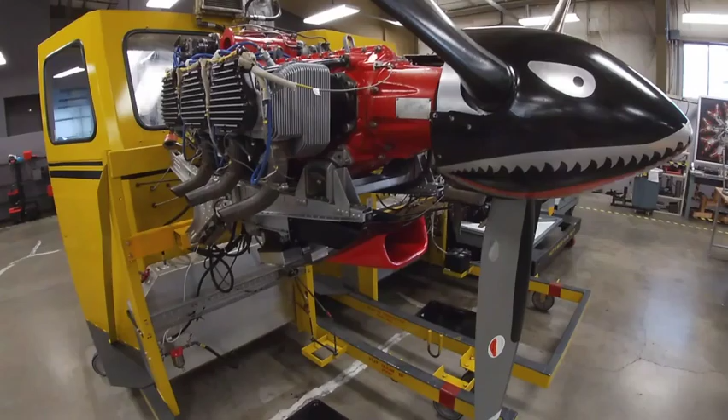Directly driven supercharged engines. Let's take a look. On this GSO 480, I should say IGSO 480, we have a directly driven supercharger, which is going to supply actual boost to this engine.

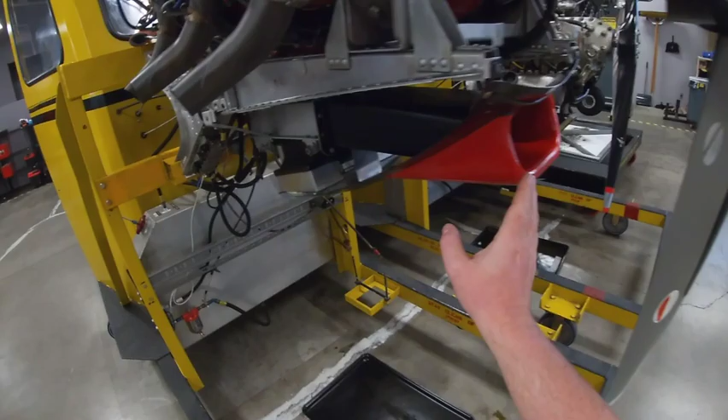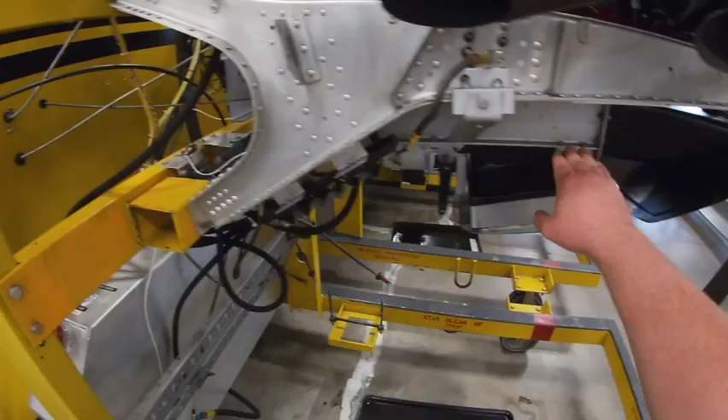The way this works is we have the front of our intake over here. This is our ram air inlet. It is going to travel through this inlet manifold, or what we call a trunk in this case. In most cases, if you have an updraft system like this under the engine, it gets referred to as a trunk. It'll come back up through here. We have our pipe, which is coming up to our supercharger section right here.

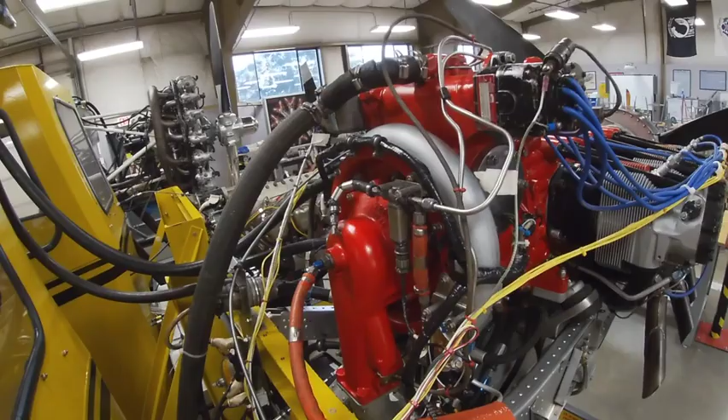Now, this one's a little bit different than some other situations you might see because this is actually an injected engine. However, it is not injected at each cylinder. Instead, what we have is a single point of injection, which is injected directly into the supercharging chamber. And down here is where we have our throttle plate, which is going to regulate airflow into the engine.

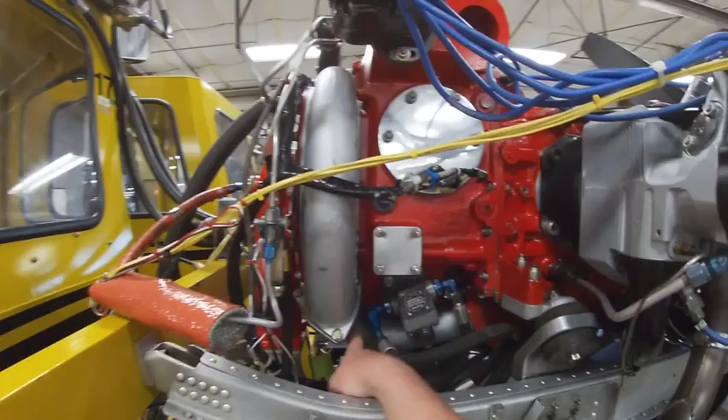Now we have an injector controller, which is controlling the fuel flow. We don't need to cover that right now. We're just focused on the supercharger itself. But you can see the housing back here. Our injector's right here. Airflow is going to come up. It goes down into the center of our impeller. It's going to get slung out against the diffusers out into this outer track. And then we're going to see it follows this intake manifold portion, which travels through the sump, and then we go to each one of our individual intake pipes.

Now, one of the reasons that you can get away with direct injection like this is because even if it's a supercharger that provides boost, it still has the ability to act as a distributing impeller, which means if we shoot fuel into it, then that fuel is going to get effectively blended up by the impeller and evenly distributed out to all these cylinders.

Now, in this case, it's a little bit different than what we would see on the 985, which we'll take a look at in a minute, because we're traveling through a single point of exit from the supercharger going out to our different intake pipes. So really, this is one fuel charge that's getting distributed out here where the pipes start to branch off.

Now, on the flip side, if we take a look at the 985, which is genuinely a distributing impeller, it works a little bit different. Now, this really doesn't provide any appreciable amount of boost. It produces a little bit of boost, but not a real appreciable amount. But what you can see as I look in here, grab a flashlight so it's a little bit easier to see. What you'll see as I look in here is these intake pipes, which are coming out of the supercharger section. Now, that supercharger section is being fed down here by our carburetor.

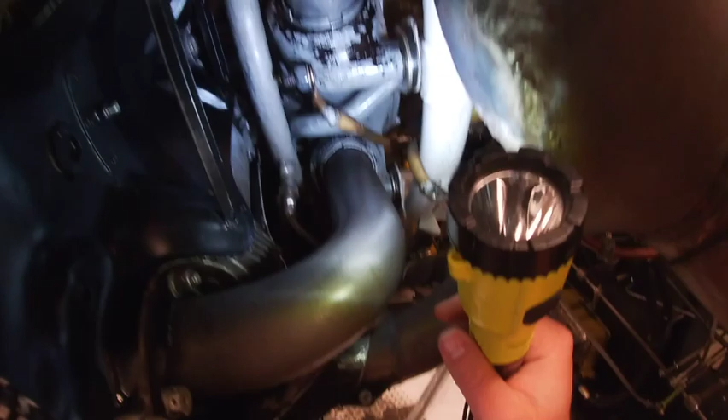Carburetor goes up into the supercharger. Voila! Again, same kind of flow down through the center of the impeller, but instead of going through a single exit point, that fuel coming from the carburetor is instead blended up by the distribution impeller, and it gets sent through each one of these 9 intake pipes in order to distribute fuel. So kind of a cool system. Works pretty well. Now, again, it doesn't necessarily have to produce much boost, but it does help us to get a more even distribution of fuel out to all of these cylinders, especially on a big radial engine like this.

Anytime we talk about supercharging an engine or producing boost, effectively we're talking about an engine that can produce manifold pressures above 30 inches of mercury or above standard atmospheric pressure. That's ultimately what we're talking about. With supercharged engines, they're driven off of the crankshaft, so rotational speed from the crankshaft is going to turn the supercharger impeller, which in turn is going to compress air as it enters the intake manifold.

Now, one key with turbochargers versus superchargers is that superchargers will compress air after it passes through the carburetor. Turbochargers compress air before it passes through the fuel metering system or carburetor. So that's ultimately what we're looking at.

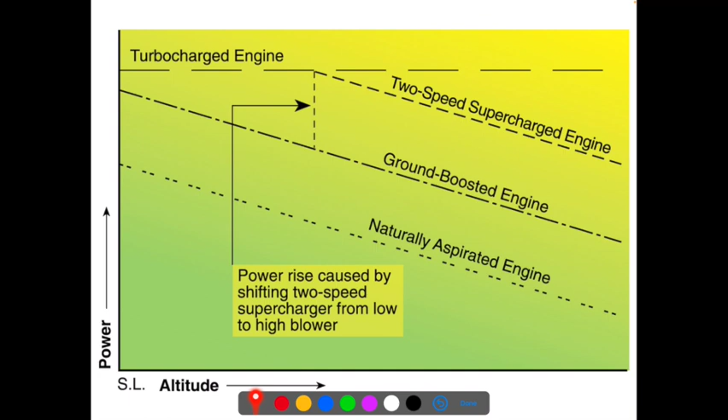Now, as we take a look at a turbocharger, effectively all it is is a cute little self-contained jet engine minus the fuel burning portion of it. Instead of having the combustion take place inside the turbo housing, what we have is a turbine, which is spun by exhaust gases, and then we have an impeller on the other side that compresses air that's entering the intake system.

Now, the area between the outlet of the turbocharger and the throttle plate, or the fuel metering system, is referred to as the upper deck. Anything past the throttle plate out to the engine is referred to as the intake manifold. Upper deck pressure will always be higher than our intake manifold pressure. The reason being is that the turbocharger is producing boost at the output, and that in turn is going to be regulated by the position of the throttle plate.

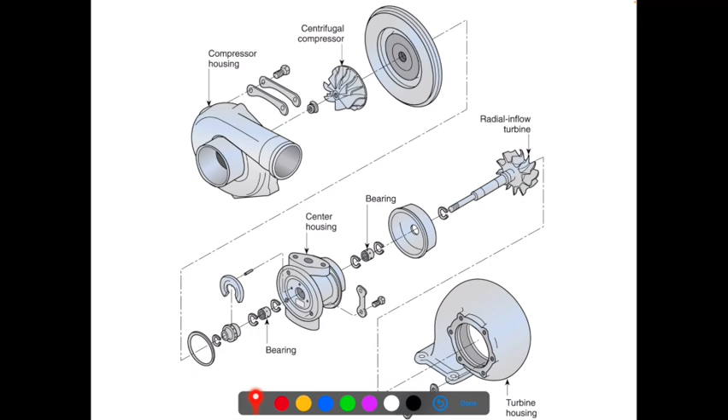Something you'll notice, though, is that turbochargers are fairly simply constructed. Part of that is because if we have too much weight or too much complexity, there's a good chance that it is going to overheat and come apart. In most cases, a lot of turbochargers can spin in excess of 100,000 RPM, which is pretty stinking fast, which moves us on to the lubrication requirements.

Now, one of the keys with lubrication in a turbocharger are these bearings right here. These are actually floating bearings. They aren't pressed into the casing. So what happens is as we have oil pressure coming through the inlet, it is going to pressurize these bearings. So it'll pressurize both the layer between the bearing and the housing, and it will also pressurize the layer between the turbocharger rotor and the bearing. So we have a nice little film of oil on either side.

It also allows that bearing to rotate at a slower speed than the turbocharger rotor is spinning as well. So in effect, we're getting more out of the same job with lubrication, so it keeps those bearings lubricated. It also has the ability to come into contact with the rotor, which is taking a considerable amount of heat from the turbine side. It can conduct that and take it out through the oil outlet.

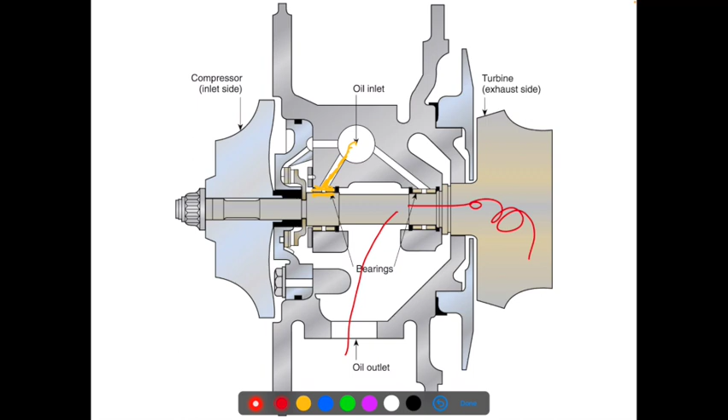So our lubricating oil both lubricates the bearings in the turbocharger and can remove heat from the turbocharger housing, and this is going to be fed from the regular engine oil supply in most cases. There's a notable exception to that, but we'll probably talk about that when we're actually in lab.

Now, if we look at a basic turbocharging system, it's pretty simple. All we have is exhaust gases, which are flowing to our turbine and exhausting through the exhaust pipe, which in turn spins the compressor, which draws air in and sends it back into the engine.

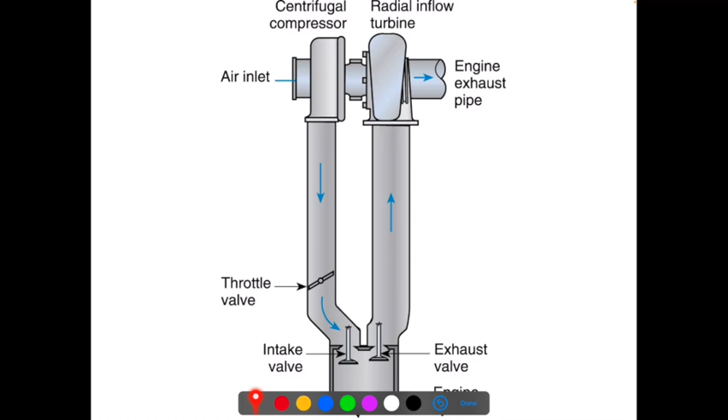Now, that's very simple, but there's no way of regulating this, so ultimately it's going to cause this turbine to overspeed and result in what we call overboost, which is very damaging to all the parts on the engine. So, in order to incorporate some regulation, we can use what we call a wastegate.

This wastegate here is installed in parallel to the exhaust system. So we have exhaust gas that's flowing through the turbine section and out the exhaust tailpipe, but we also have exhaust gas that can flow through the wastegate and out the exhaust pipe. The idea is that we have a spring inside our wastegate controller which turns this into a normally open position. When this wastegate is open, it allows exhaust gases to bypass the turbo and therefore slow down the speed the turbine is rotating.

However, when we build up oil pressure in this wastegate actuator, it forces this butterfly valve closed and forces more or all of the exhaust gas to flow through the turbine, therefore spinning it faster and faster, which gives us more compression going through the compressor side.

Now, the way this works is very similar to the way that a propeller governor works, in that as oil pressure enters into this wastegate, we can restrict over here, far away, if you can picture that, the flow of oil exiting that wastegate. So the more we restrict it, the more pressure is going to build up in that wastegate and it's going to push that piston in.

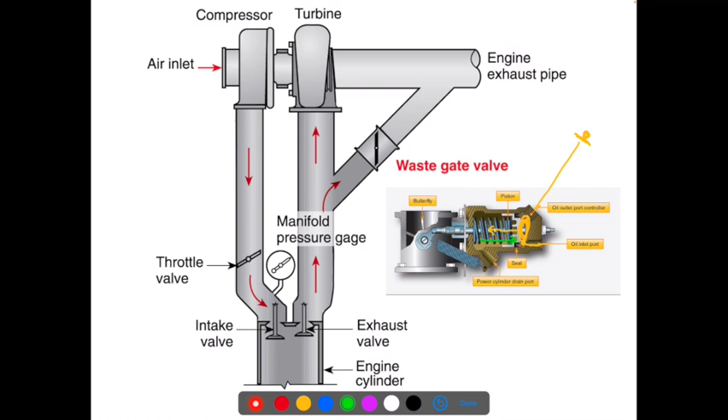However, if we relieve the restriction, so if we have a metering valve, whatever it is, if we relieve that restriction, then it's going to allow oil to flow out at a greater rate. Then the return spring is going to overcome the oil pressure and the wastegate can open back up. Very simple mechanism, but very reliable.

Now, in the instance that we don't have a wastegate controlling it, we still have one way of controlling our output, and that is using an adjustable wastegate valve restrictor. Effectively, it's something that's set on the ground, and we have a pressure relief valve in line with the compressor to make sure that the system doesn't overpressure.

All that happens is this valve gets set up as a restrictor for maximum output at the critical altitude of the engine. As a result, that's the only variation we get. So the turbine is going to spin faster and faster, and the only thing that protects this system from overpressure is this pressure relief valve that will release additional upper deck pressure as necessary.

The next part gets a little bit complicated because we start talking about controllers. So I'm going to try to break this down as simply as possible. If you need to rewatch the video, well, that's why it's on a video. So let's dive into this.

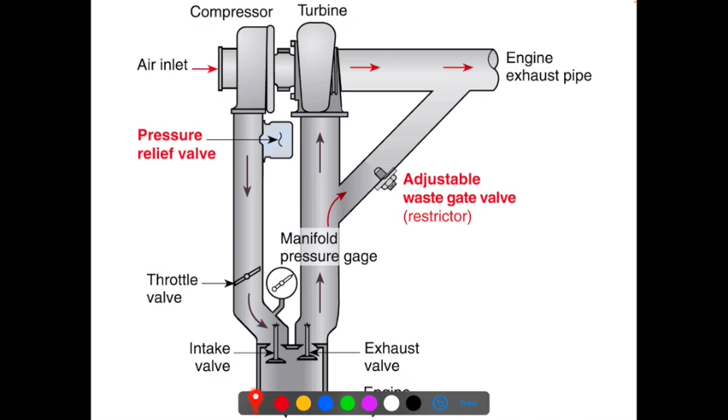In a very basic system, this is something you'd see typically with a Teledyne Continental motor. They like this system quite a bit. And there's a couple familiar parts here. We have our wastegate actuator over here. And what you can see is we have oil entering from the engine and then exiting to our controllers. And it's eventually going to go back to the oil sump, since it's all part of the same system.

What we have over here are two controllers that are installed in parallel. We have the absolute pressure controller and we have the pressure ratio controller. Now, the job of an absolute pressure controller is to monitor the upper deck pressure before it heads to the throttle valve and into the intake manifold.

Effectively, there is a bellows that's charged with nitrogen on the inside that is sensitive to a specific preset pressure inside the upper deck. So effectively, it is controlling the upper range that the upper deck can have in terms of pressure coming from boost.

So what happens is as the throttle is advanced, we are going to push more exhaust gas through this system and through the turbine. Now, the wastegate is normally going to be open during start, and it will continually close as needed to maintain the higher upper deck pressure that we need.

So as long as our upper deck pressure is beneath the maximum level, so we'll indicate this here, our upper deck pressure is getting fed into this controller, and so long as it stays underneath the maximum level, this pressure controller is going to stay closed with this little metering valve, which as a result is going to build up pressure in our wastegate actuator and close the wastegate, which gives us faster speed. As the turbine continues to spin faster and faster, we will build up upper deck pressure.

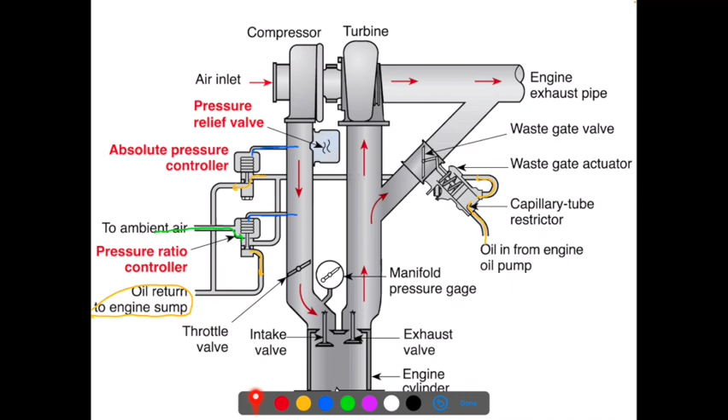So as we start to get outside of that ratio, if we build up too much pressure in the upper deck, it's going to push down on this bellows, overcoming pressure from ambient air, and it's going to open up this restrictor valve, which again allows excess oil flow back to the sump. So effectively what we have are two different controllers installed in parallel. Either controller has the ability to force the wastegate actuator to open up and allow exhaust gas to bypass out through the tailpipe. Now I mentioned this is pretty typical to Teledyne Continental.

There are two additional controllers that we didn't have a chance to talk about. We talked about our absolute pressure controller, the APC, which is just going to monitor pressure in the upper deck, and it's all based on how that bellows is set up on the inside. On the other hand, we have a variable absolute pressure control. What that does is effectively the same job. The only difference is we have a throttle controlled cam over here. All that cam does is increase pressure pushing against this restrictor valve, which is going to change this balance with the aneroid up there.

And all that throttle controlled cam does is create basically a scheduled boost range for any given throttle position. So it provides control over the turbocharger output at all throttle ranges, all the way up to maximum throttle, and it's directly linked in. When you're looking at these from the outside, the easy way to tell if it's a regular APC or a variable APC is that throttle controlled cam.

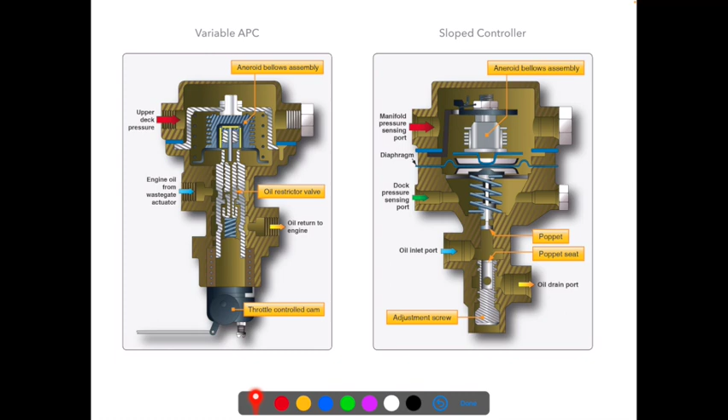It's a lot, so if you need to take a second to pause, please go ahead, but otherwise we'll keep moving along. In this case, we're going to take a look at something that is typical of the Lycoming system, and this is an example of what would be probably considered a normalizing turbocharging system. And effectively, most of the components are going to be the same.

We still have our wastegate and wastegate actuator. We have exhaust gases flowing through the turbine and in parallel through the wastegate. We have our air inlet that's feeding the upper deck and the intake manifold. Now, something that's interesting to notice here is we have a density controller and we have a differential pressure controller. The density controller is a little bit different than what we're used to seeing with the Continental systems, in that the density controller is only going to regulate the position of the wastegate at wide open throttle.

But the added benefit it has is it has this nitrogen charged bellows, which allows it to compensate not only for the pressure in the upper deck, but it can also compensate for the changes in density of the air moving through the system according to temperature. So as the temperature increases or decreases based on output of the turbocharger, atmospheric conditions, it is going to regulate based upon that, but also upper deck pressure. So the density controller controls our top end with the turbocharger output.

For all positions other than maximum output, we have this differential pressure controller. And the way that that works is for all positions of the throttle, remember, this throttle plate acts as a restrictor. So as we have a lot of pressure built up in the upper deck, this differential pressure controller is going to limit the amount of air that can move through, and so we can create different pressures on the other side of the throttle plate in the intake manifold.

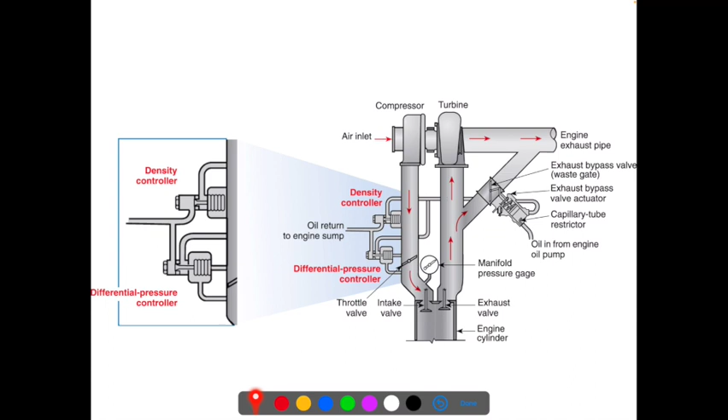Relatively straightforward. Something that trips up mechanics pretty frequently is trying to figure out where in the world all of the components and controllers for a turbocharger are on the engine. It's one thing looking at a schematic on a page going, okay, great, that's where it is. It's a little bit tougher when you actually try to find it on the aircraft for an inspection.

So I'm going to show you my tried and trusty method here for identification, which is basically kind of the same way you untangle an extension cord or a knot. You just start pulling at one thread and keep following until you get to the end of it. So the turbocharger is going to be driven by exhaust gas, so what I like to do is follow the exhaust system back to the turbocharger.

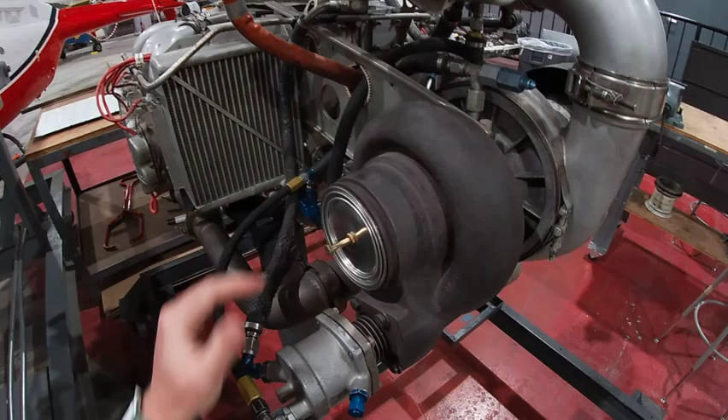So right back here, we have our exhaust header coming off of one side, and we're coming, boy, look at that, right to this big old turbocharger. Now, one thing you'll notice is it's not where it is on every other installation I've seen, but we're going to have a wastegate somewhere on the exhaust side of this turbocharger to regulate airflow, and by golly, there it is. Here is our wastegate, and what this is going to do is it's going to regulate how much exhaust is allowed to spool through this turbine section of the turbocharger or how much is allowed to exit.

This cover plate would not normally be in place, especially since that's just a paint lid. It actually is not supposed to be there. Anyway, normally exhaust would come out through the center portion bypassing the turbine wheel on the turbine side here, and that is what would power our turbocharger.

So here's our wastegate controller. Remember, we have a spring-loaded valve in here which is going to move back and forth, and that is controlled by oil pressure. So we have two lines. This is going to be oil pressure. One is going to be oil in, one is going to be oil out. Now, the way you can tell which one is oil in is because it is the line that goes directly to the engine itself.

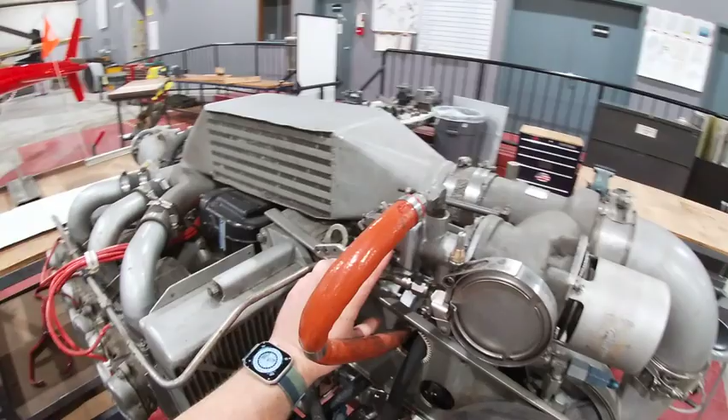On the flip side, we have up here, where our upper deck is, an oil line that runs up to, oh, here we are. This is our absolute pressure controller. So as oil flows through, it's going to flow into this chamber on our wastegate, and then it's going to continue to flow up to our controller.

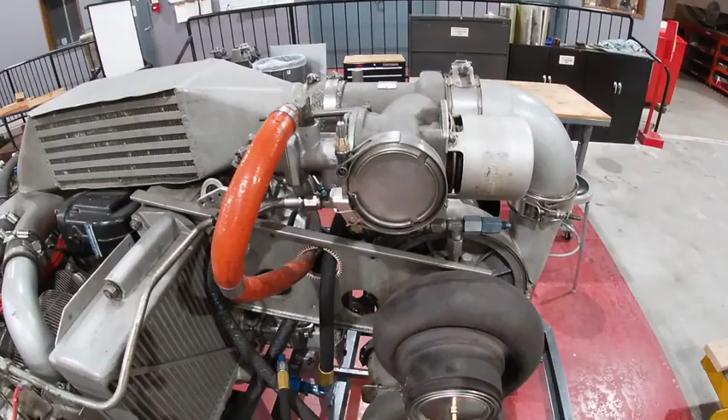This controller is what controls the leak rate of oil coming from the wastegate, going back to the engine return through this line. It controls basically how fast oil can leak out of this wastegate, which ultimately is going to control the position of the wastegate. So the more wide open this is, the more oil flow, which means the wastegate is going to be allowed to be more open, which reduces the amount of boost we get.

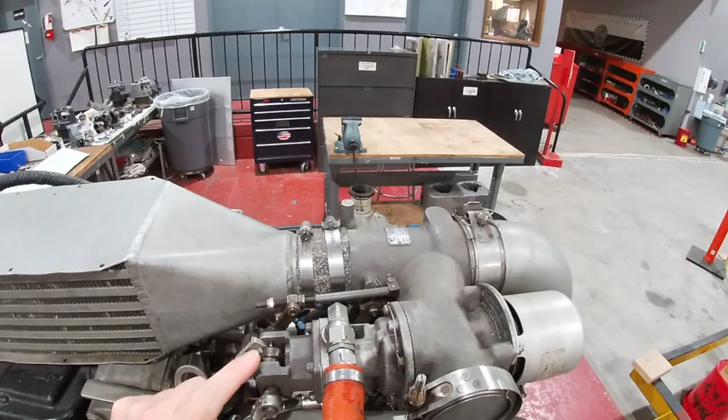On the flip side, as this seat is closed, then our oil flow is restricted. We build up oil pressure in our wastegate controller here, forces the wastegate closed, and we get faster rotation on our turbocharger. Now, as I look at this, I can tell you right now that it is a variable absolute pressure controller, VAPC. Why can I say that? Well, when I look at our throttle linkage right here, you'll notice there is a nice, neat little cam up at the top. You can see that moving back and forth.

Remember, the only big difference between an absolute pressure controller and a variable absolute pressure controller is the VAPC has a cam that's linked to the throttle so that we can effectively force the scheduling or boost amount based on throttle position rather than just what the pressure controller is sensing. So as we advance the throttle, it's going to create more spring tension against that aneroid and poppet valve. It's going to make it harder for it to unseat, which as a result builds up more oil pressure for us. Everything works.

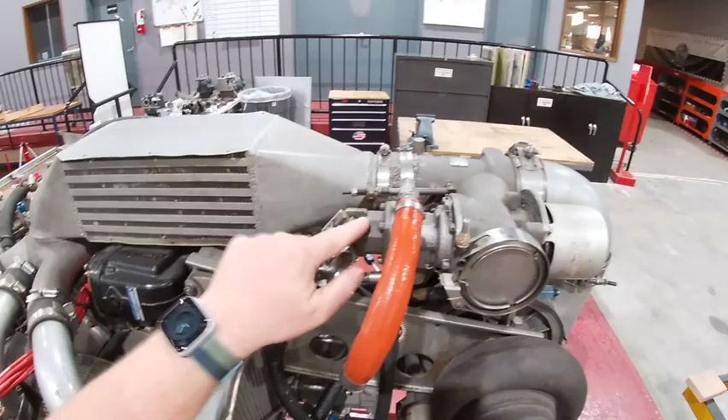So there are our two controllers. We have the wastegate and the thing controlling the wastegate. And we really don't have any other controllers on this, and I can verify that by the fact that there are no other systems plumbed in that are going to change how oil flows out of this wastegate controller. So this is our only line out, and it goes through this controller right here. If we had another controller in parallel, it would function in parallel so that if it needed to change the amount of boost being produced, then it could take out that oil pressure.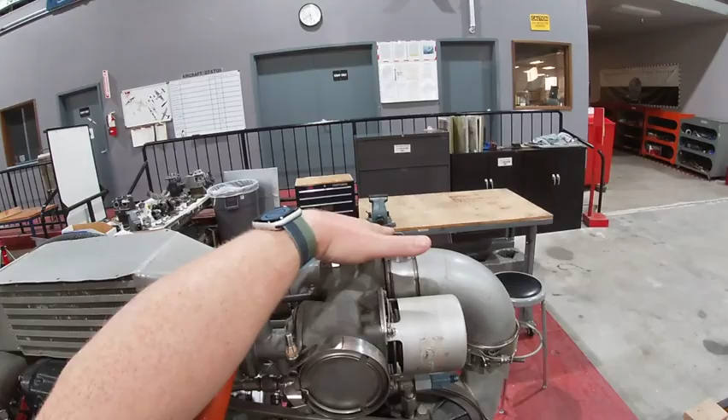Now, on the flip side, this is not a sensing controller, but rather it's just a pressure relief valve. So up here would be considered our upper deck section, right? Anything prior to the throttle valve is going to be considered our upper deck, which means if we start building up too much pressure in the upper deck, if the turbocharger is over boosting, it's going to unseat this pressure relief valve, and we're going to allow pressure to be sent overboard and protect the system. Everything downstream from the throttle valve is going to be considered our intake manifold.

Right here we have our aftercooler. Remember, intercoolers are only in between stages of boost. If it is after a device that is providing boost, namely a turbocharger, then this is an aftercooler. The aftercooler feeds our intake manifold over here, which is going out to our cylinders.